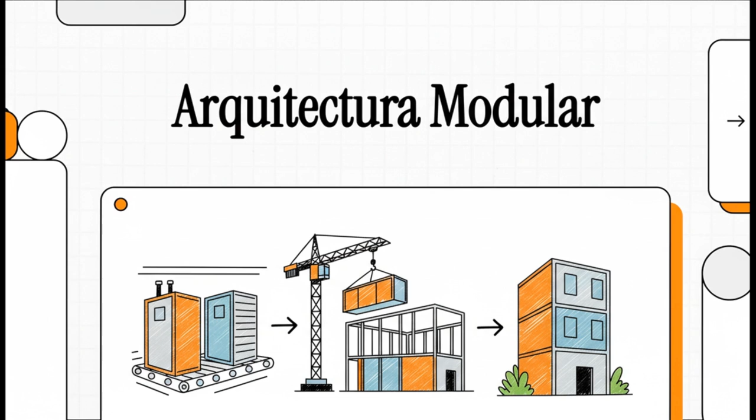¿Y si pudiéramos construir edificios de altísima calidad, pero mucho más rápido y con menos desperdicio? Suena bien, ¿no? Bueno, pues justo de eso se trata una idea que está de verdad cambiando las reglas del juego en la construcción: la arquitectura modular. Es una respuesta súper innovadora a lo que necesitamos hoy en día.

Y esta pregunta es la clave de todo, de verdad. Imaginen por un segundo la precisión, la eficiencia, ese control de calidad casi perfecto de una fábrica de coches. Pero ahora apliquen todo eso a las casas, a las oficinas, a los lugares donde pasamos la vida. Justo esa es la gran promesa de la arquitectura modular.

Es que, seamos honestos, la forma en que hemos construido siempre tiene sus broncas, ¿no? Los retrasos son el pan de cada día, los costos se disparan y ni hablar del impacto ambiental. Por eso, la verdad, urge encontrar otras formas de hacer las cosas, maneras más inteligentes de construir nuestro mundo.

Y es justo ahí, en ese punto, donde la arquitectura modular levanta la mano. No es nomás una opción más, ¿eh? Es una respuesta directa y muy pensada a todo esto que estamos hablando. Lo que busca es optimizarlo todo: recursos, tiempo, energía, vamos, todo lo que es súper valioso hoy.

Ok, entonces ya vimos el por qué. ¿Por qué necesitamos algo nuevo? Ahora vamos a meternos de lleno al qué, o sea, ¿qué es exactamente esto? Y para entenderlo bien hay que empezar por su pieza clave, su corazón: el módulo. En pocas palabras, es un método que parte un proyecto enorme en pedacitos, en piezas que se pueden manejar mucho mejor y que se construyen dentro de una fábrica, en un ambiente totalmente controlado.

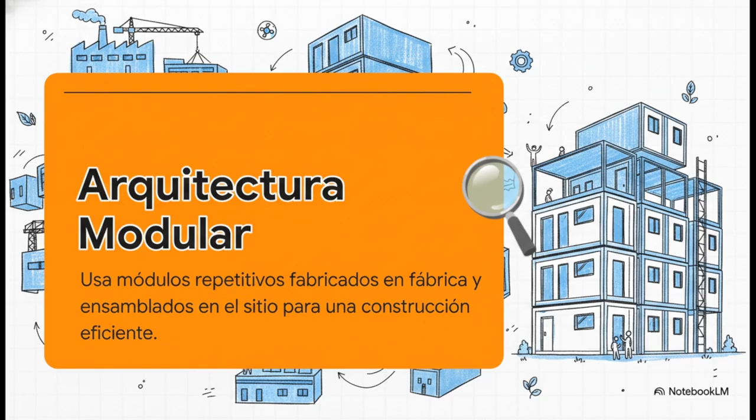Piénsenlo así: es como jugar con Legos, pero Legos gigantes, de alta tecnología, que al final se juntan en el terreno para formar el edificio completo. Pero ojo, y esto es súper importante, un módulo no es nomás una caja vacía, para nada. Puede llegar ya de fábrica con todo listo: la plomería, los cables de la luz, los acabados, hasta las ventanas puestas. O sea, es una pieza súper sofisticada, prácticamente terminada.

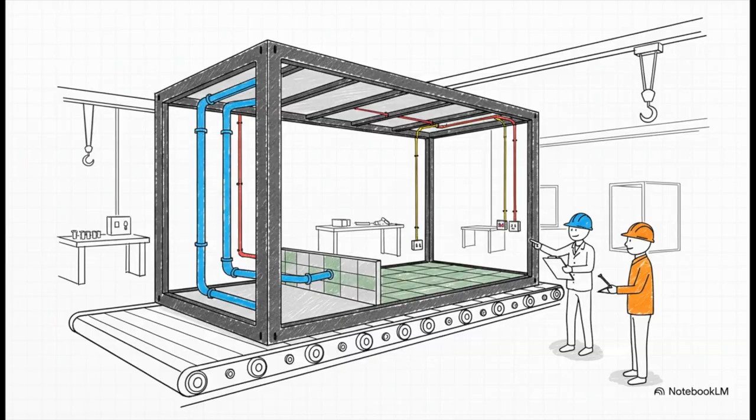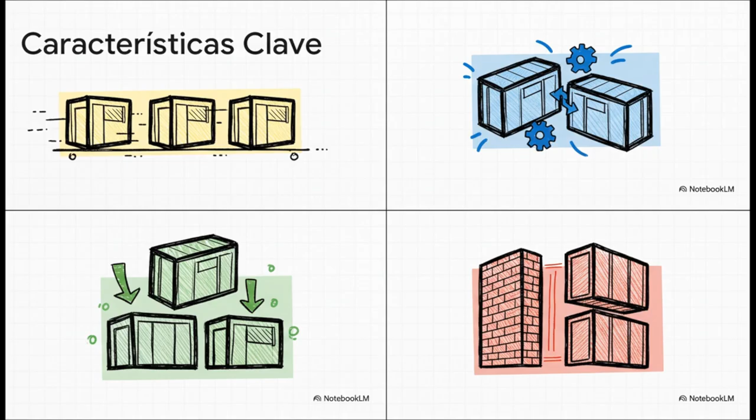Y lo que hace que estos módulos sean tan geniales son estas 4 características. Primero, son repetitivos, o sea, se pueden producir en serie como si fueran coches, lo que los hace súper eficientes. Segundo, son interconectables: todo está diseñado para que embonen a la perfección, sin fallas, como un rompecabezas de precisión milimétrica. Luego está la flexibilidad: se pueden añadir, quitar o cambiar módulos, así el edificio puede crecer o adaptarse a nuevas necesidades. Y por último, se pueden integrar con la construcción de toda la vida. Esta mezcla le da una versatilidad increíble.

Muy bien, entonces, ¿cómo funciona todo esto en la práctica? Bueno, el proceso es de hecho una de sus ventajas más grandes, porque le da una vuelta de 180 grados a la forma tradicional de trabajar. Aquí es donde está la verdadera magia del asunto. Fíjense bien, lo que cambia todo es que los 2 primeros pasos, la fabricación en la fábrica y la preparación del terreno, suceden al mismo tiempo.

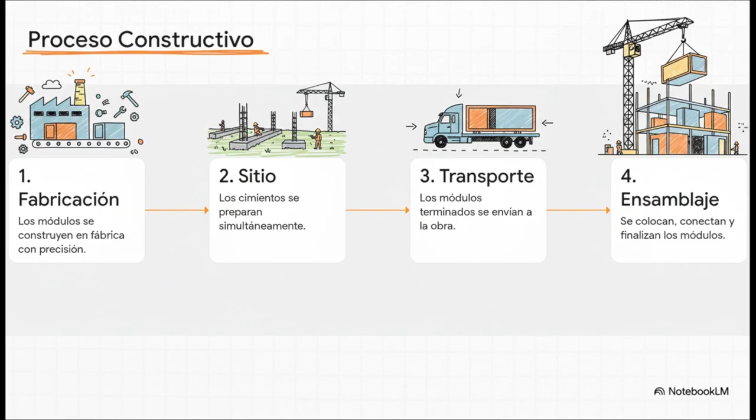Mientras en un lugar se están construyendo los módulos con una precisión increíble, en el sitio de la obra ya están preparando los cimientos. Esto solito elimina meses de tiempo muerto del proyecto. Es un cambio brutal. Y claro, toda esta eficiencia en el proceso se traduce, como es de esperarse, en beneficios súper concretos, de esos que se pueden medir, que al final del día es lo que cuenta.

Entonces, para resumir, tenemos ahorros importantes en costos y en tiempo. La calidad es mucho mayor porque no es lo mismo construir a la intemperie que en un ambiente controlado de fábrica. Y además es más sostenible, menos basura y edificios que gastan menos energía. Son puros beneficios. Ahora, para lograr este nivel de precisión y eficiencia, el material que se usa es clave.

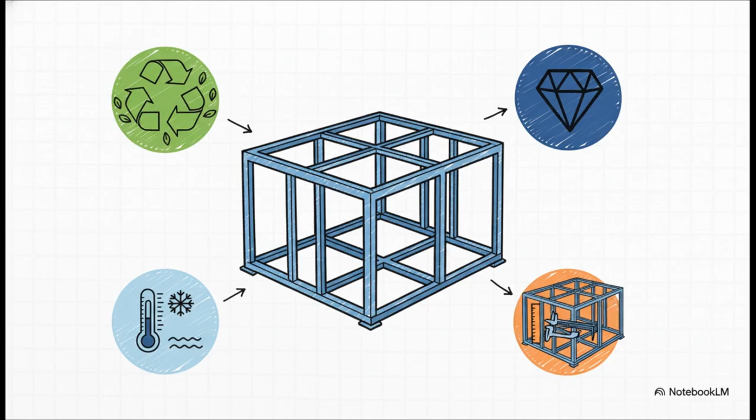Y en este mundo de la construcción modular, hay un material que es el rey. Hablamos del acero. Es perfecto para esto. Es súper resistente, pero a la vez ligero, lo que ayuda muchísimo a la hora de transportar los módulos. Se puede reciclar casi al 100%, así que cumple con la parte de la sostenibilidad. Y sobre todo, su uniformidad lo hace ideal para los procesos de fabricación que necesitan una precisión casi quirúrgica.

Allá por 1967, el proyecto Habitat 67 en Montreal fue como un grito al futuro, un experimento increíble que demostró lo que se podía hacer. Era una visión. Hoy, esa visión ya no es un experimento loco, es una realidad, una solución súper práctica gracias a la tecnología. Y si miramos hacia el futuro, parece que va a ser una pieza clave para construir las ciudades más densas y sostenibles que tanto necesitamos.

Y esto nos lleva a una reflexión final bien interesante, porque la arquitectura modular es mucho más que un simple método de construcción. Es una invitación a cambiar el chip, a pensar diferente sobre cómo creamos nuestros espacios. Se trata de diseñar pensando desde el principio en la flexibilidad, en la adaptación y, por supuesto, en una producción mucho más inteligente y responsable.

Así que nos quedamos con esta pregunta flotando en el aire. ¿Será que en nuestro futuro ya no se construye ladrillo por ladrillo, bajo el sol y la lluvia, sino que se ensambla con la precisión de un relojero? Todo apunta a que el futuro efectivamente se ensambla.

Bueno, pues interesante, ¿no? Está hablando de una filosofía más que de una forma de construir, es una manera de pensar. Así que vamos entonces a entrar en este interesante tema.

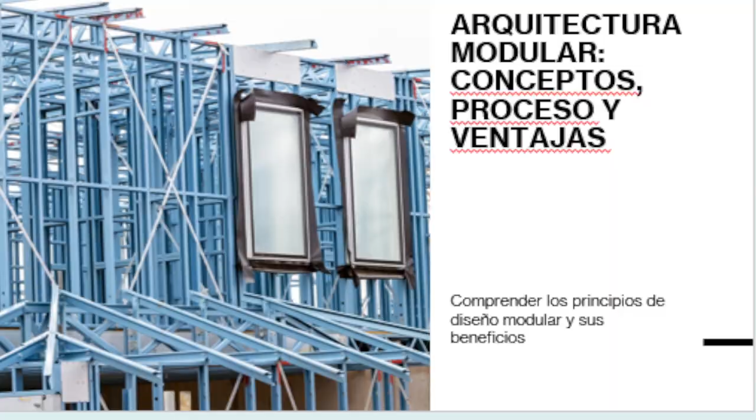Entonces, vamos a introducirnos a la arquitectura modular, ya no como principio solo de diseño, solo de concepto, sino como un concepto que tiene que ver con las diferentes formas en las que la construcción y por supuesto la industria ha ido mejorando e irá también avanzando en ese sentido hasta lograr una sistematización industrial de estos procesos que cada día son más comunes.

Muy bien, entonces, ¿cuál sería la relevancia, la importancia que tiene para nosotros en el punto de la arquitectura contemporánea? Bueno, primero es que los módulos se diseñan de manera general, siempre de manera prefabricada. Piensen un poquito en lo que les estoy pidiendo que ustedes realicen ahorita en esta parte preliminar del ejercicio, en donde el módulo, es decir, el cubo, tiene una función netamente industrial.

De hecho, el ejercicio consiste básicamente en eso, en que ustedes resuelvan solo uno de los módulos, que es lo que quiero que ustedes entreguen o que debieron haber entregado ya el día de hoy. Y por supuesto que también a partir de ese módulo se realice un proceso de industrialización. ¿Cómo va a ser?

Bueno, van a sacar ahora copias fotostáticas, no las van a sacar de manera común, van a tener que buscar un material que es la opalina o el papel cuché. Preferentemente, yo solicito que sea el papel cuché. El papel cuché es un papel mucho más grueso, por supuesto mucho más brillante y da un acabado que nos va a dar como resultado de la pared un elemento muy interesante. Entonces, eso lo van a tener que reproducir, por eso digo, a nivel industrial.

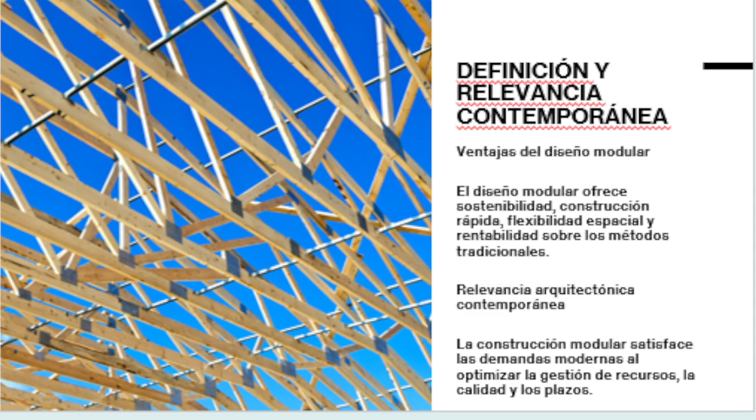Muy bien. Ahora, ¿qué más podemos decir nosotros en términos de esta condición en la que nos movemos en términos del proyecto? Pues que en el corazón de este concepto está el módulo. ¿Qué es un módulo? Bueno, hemos ya visto acerca de esto. Hemos platicado acerca de cómo las condiciones en las que nosotros estamos diseñando es simplemente una repetición de un elemento que de manera prefabricada, en el contexto constructivo, nos sirve para integrar muchas unidades, sumas, y en eso consiste el ejercicio, sumas de unidades que van a generar diferentes estructuras.

Bueno, entonces la función básica del módulo o la condición básica es su repetitividad. Es decir, que nosotros vemos que el mismo está constantemente en la misma situación y por supuesto también tiene el mismo tamaño, la misma forma y desarrolla la misma función o funciones similares, lo que permite que haya una fácil producción en masa e integración de sistemas. Entonces, eso sería básicamente la conceptualización que tenemos acerca del módulo.

Muy bien. Entonces, ¿cuáles son algunos otros componentes o elementos que nos ayudan? Bueno, pues su interconectividad, su flexibilidad y también la posibilidad de integrarlo con métodos tradicionales cuando se adaptan para recibirlos, mejorando su versatilidad. Es decir, la modulación no es solamente un concepto que tiene que ver con lo nuevo, con lo que se hace por primera vez, sino también con una intencionalidad en donde existen recursos para poder integrar el módulo a construcciones que ya son tradicionales o construcciones previas.

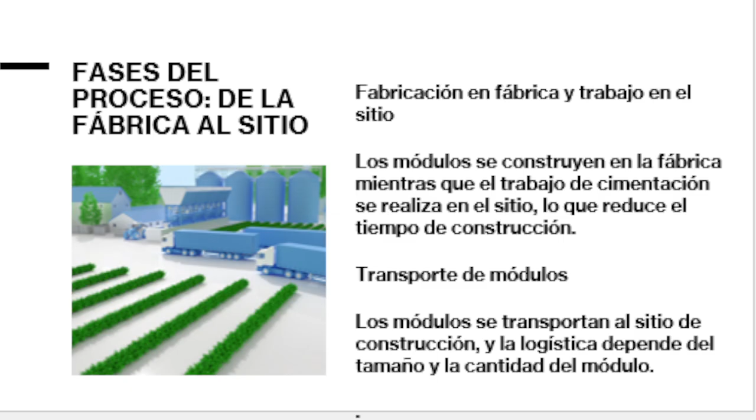En este contexto, construido el módulo, que incluso se puede construir con las ventanas y demás, nada más llega y se coloca en el sitio. Y pues, por supuesto, una grúa y demás harán todo el sistema de montaje de las diferentes piezas.

Otra de las características del módulo es que estas unidades prefabricadas... perdón, aquí me regresé a la diapositiva anterior, una disculpa. Estamos aquí, muy bien.

Entonces el montaje es lo que diríamos es importante. Mencionaba yo lo de las grúas, cómo se colocan en el sitio, y de esta manera van reduciendo muchísimo los tiempos de ejecución. Sobre todo hay una cosa importantísima: la calidad de la ejecución. No en este momento, pero después les voy a hablar específicamente de una casa que se hizo en Estados Unidos con estas características, donde la casa se monta en un día. Una casa bastante interesante como concepto constructivo y de diseño, que se hace con este mismo sistema.

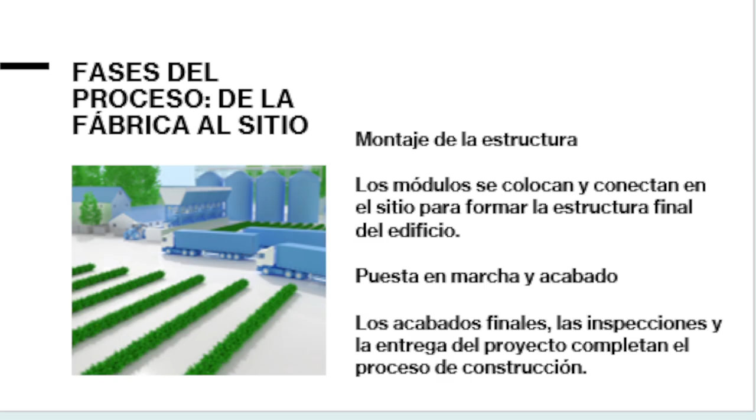Es el montaje con unas grúas y demás, y después de esta etapa ya sería el de los acabados, que pueden ser algunos detalles que se vayan puliendo, porque el módulo ya puede venir con los acabados. Pero sí la parte que tiene que ver con darle ya una unidad formal a todo el exterior. Entonces ahí estaríamos hablando de cuáles serían algunos de los procesos que se llevan en ese sistema, y pasaríamos a ver cuáles son algunas de las ventajas que tiene la arquitectura modular.

Primero, las instalaciones técnicas se optimizan porque, por ejemplo, todo lo que tiene que ver con la plomería y la electricidad se puede realizar en el módulo, en la fábrica; no tiene que llegar allá el electricista a atender tuberías, cables, ni nada que tenga que ver con la instalación de tableros, etcétera. Ya todo viene perfectamente armado. Sería una de las cuestiones básicas que se puede optimizar en ese sentido.

También se puede mejorar la eficiencia energética. ¿En qué sentido? Pues que estos módulos también pueden integrar dentro de su construcción sistemas de aislamiento térmico, aislamiento acústico, y todo esto va a generar una eficiencia energética.

Actualmente tenemos problemas con las fugas de aire acondicionado, por ejemplo en el salón, en otros lugares, porque no están diseñados los espacios para prever que los muros de bloc o las cancelerías de aluminio no tengan fugas, en el sentido de la eficiencia; es decir, los aires están prendidos todo el día.

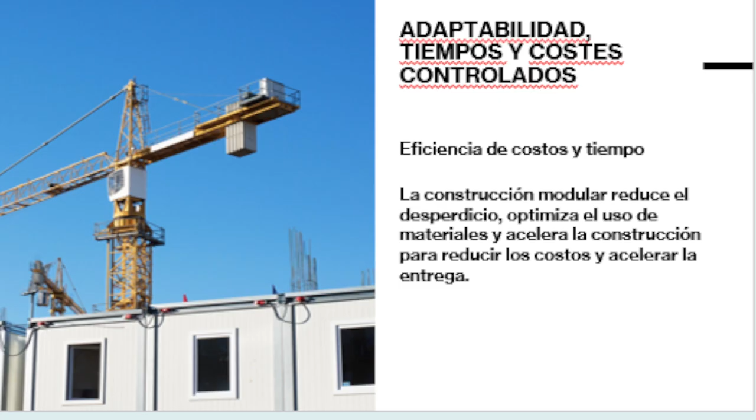Entonces, en las fábricas y en los sistemas que están ya más sistematizados, no se tiene esta problemática climática. Esto hace que los costos se reduzcan, que también se acelere la construcción y también se aceleren los tiempos de entrega en un tiempo en donde cada vez se hace más complicado generar las viviendas que necesitamos con mayor velocidad.

Y también el uso de los materiales nos ayuda en este contexto: la madera, los acabados vegetales, son algunas de las posibilidades que tenemos con respecto a las diferentes formas en las que se pueden integrar los materiales. El acero también lo vimos en la parte del video inicial, es uno de los que ayudan bastante, porque es reciclable y es ligero en el sentido de la transportación.

Imagínense, solamente módulos de concreto, pues son pesados, pero uno de los grandes beneficios es este tema que siempre va a estar en discusión. Lo aclaro desde ahorita, porque hay quienes hablan mucho de cómo la densidad, es decir, el número de viviendas o construcciones que hay en un lugar, afectan la parte que tiene que ver, en el caso nuestro, con el entorno, el ambiente.

En la medida que hay muchos espacios horizontales, pues lo vemos aquí en Playa del Carmen, van creciendo las unidades habitacionales, siempre en un sentido horizontal. Bueno, la construcción modular ayuda muchísimo para la expansión vertical urbana, es decir, esto permite que no haya tanto desarrollo en el sentido horizontal, reduciendo tiempos de movilidad. Trae otras problemáticas que no es el punto a aclarar ahorita, pero es una de las ventajas que podría tener básicamente el diseño modular.

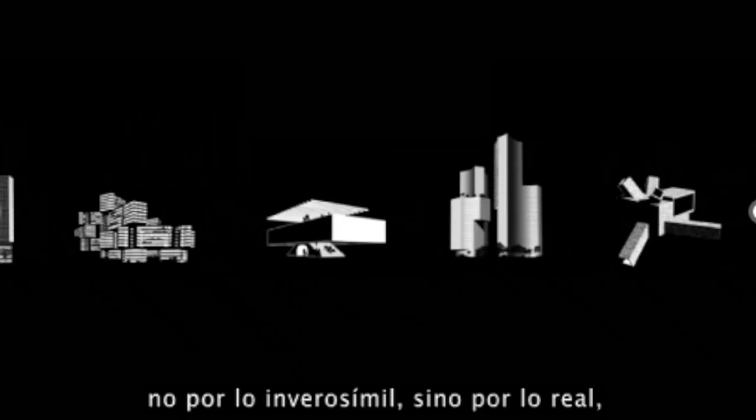In this sense, I'm interested in fiction not as the implausible, but as the real, as the reality of what architecture means for the people that live in it and with it.

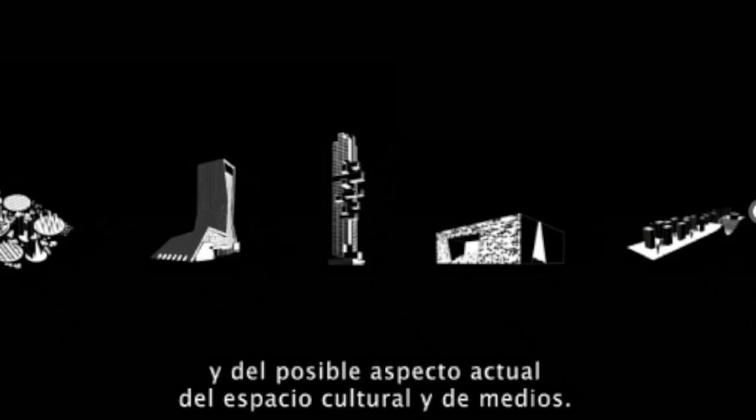Our buildings are prototypes, ideas for how the space of living or how the space of working could be different, and how a space of culture or a space of media could look like today. Our buildings are real, they're being built. They're an explicit engagement in physical reality and conceptual possibility.

I think of our architecture as organizational structures. At their core is indeed structural thinking, like a system. How can we arrange things in both a functional and experiential way? How can we create structures that generate a series of relationships and narratives?

And how can fictive stories of the inhabitants and users of our buildings script the architecture, while the architecture scripts those stories at the same time?

And here comes the second term into play, what I call narrative hybrids. Structures of multiple simultaneous stories that unfold throughout the buildings we create. So we could think of architecture as complex systems of relationships, both on a programmatic and functional way, and in an experiential and emotive or social way.

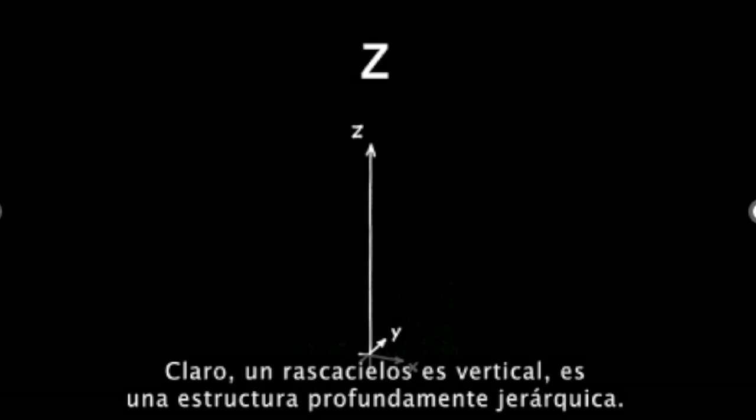Of course, the skyscraper is vertical. It's a profoundly hierarchical structure, the top always the best, the bottom the worst, and the taller you are, the better so it seems. And we wanted to ask ourselves, could a building be about a completely different quality? Could it undo this hierarchy? And could it be about a system that is more about collaboration rather than isolation?

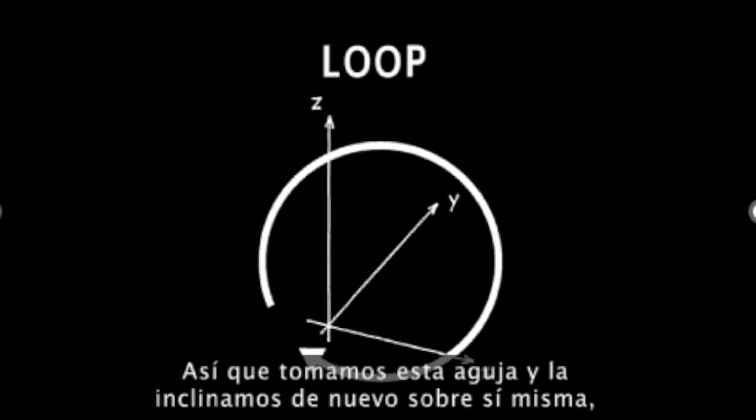So we took this needle and bent it back into itself, into a loop of interconnected activities.

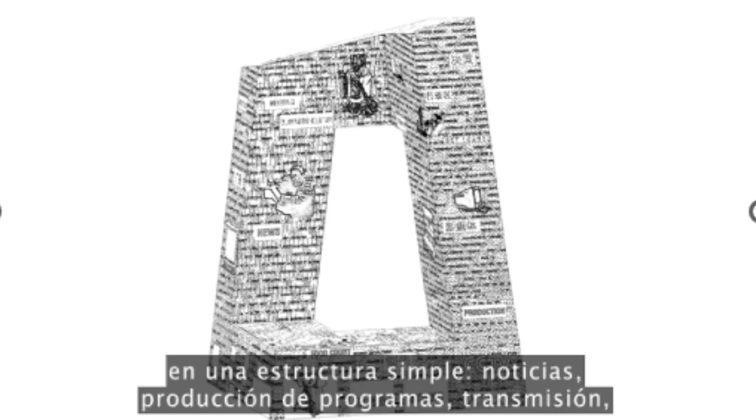Our idea was to bring all aspects of television making into one single structure: news, program production, broadcasting, research and training, administration, all into a circuit of interconnected activities where people would meet in a process of exchange and collaboration.

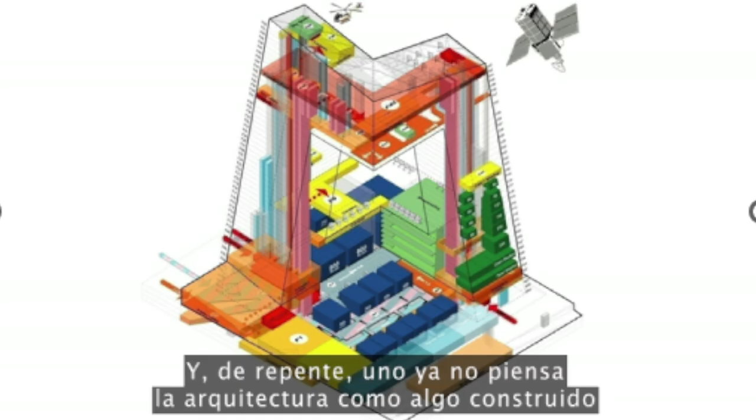I still very much like this image. It reminds me of biology classes, if you remember the human body with all its organs and circulatory systems, like at school. And suddenly you think of architecture no longer as built substance, but as an organism, as a life form.

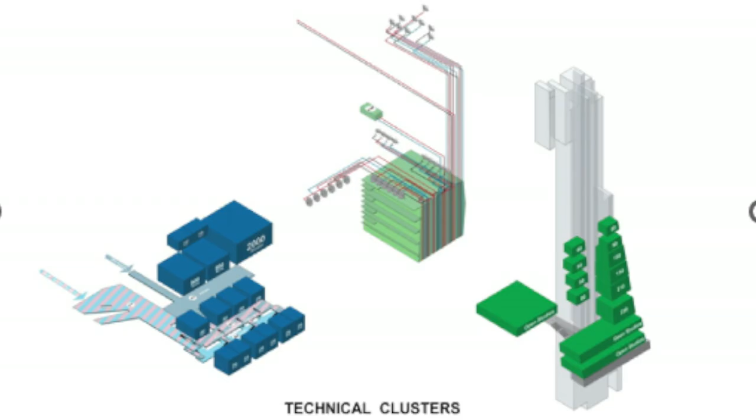As you start to dissect this organism, you can identify a series of primary technical clusters: program production, broadcasting center, and news. Those are tightly intertwined with social clusters: meeting rooms, canteens, chat areas, informal spaces for people to meet and exchange. So the organizational structure of this building was a hybrid between the technical and the social, the human and the performative.

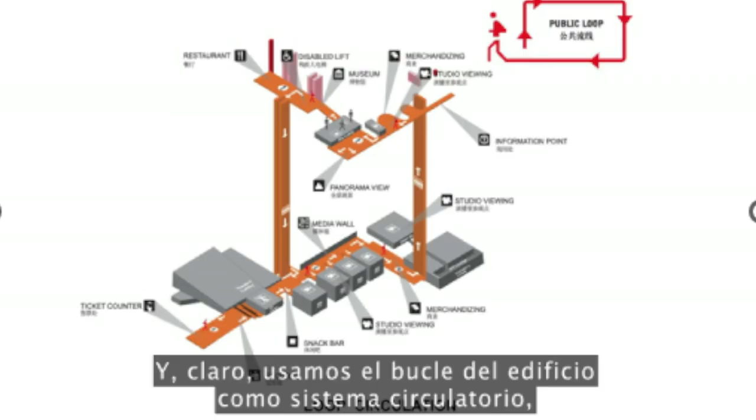And of course, we used the loop of the building as a circulatory system to thread everything together and to allow both visitors and staff to experience all these different functions in a great unity.

With 473,000 square meters, it is one of the largest buildings ever built in the world. It has a population of over 10,000 people, and of course this is a scale that exceeds the comprehension of many things, the scale of typical architecture.

So we stopped work for a while and sat down and cut 10,000 little sticks and glued them onto a model, just simply to confront ourselves with what that quantity actually meant. But of course it's not a number, it is the people, it is a community that inhabits the building.

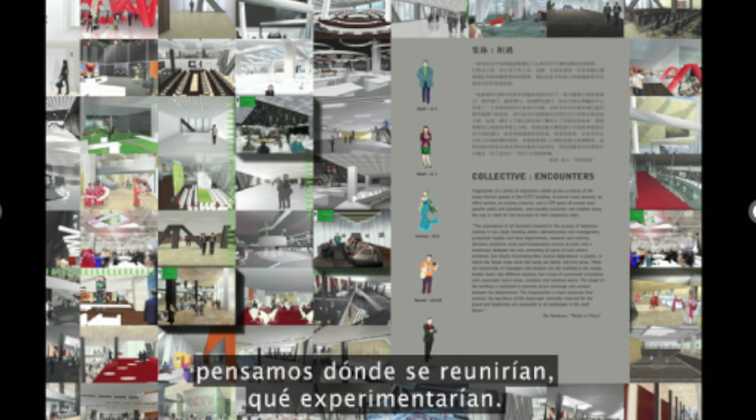In order to both comprehend this but also script this architecture, we identified 5 characters, hypothetical characters, and we followed them throughout their day in a life in this building, thought of where they would meet, what they would experience. So it was a way to script and design the building, but of course also to communicate its experiences.

And this was part of an exhibition with the Museum of Modern Art in both New York and Beijing.

The building has become part of everyday life in Beijing. It is there. It has also become a very popular backdrop for wedding photography.

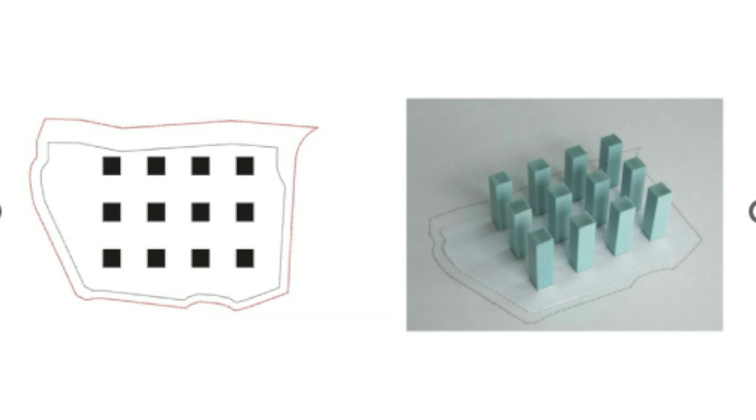The typical answer to the question, we had to design 1,040 apartments, would have looked like this: 24-story height limit given by the planning authorities, 12 towers with nothing but residual space in between.

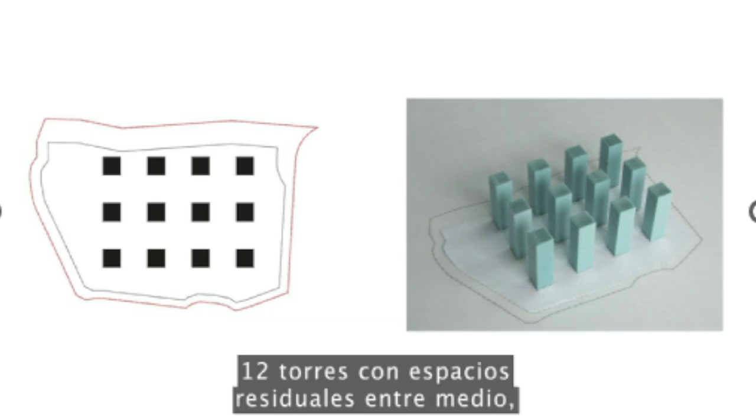A very tight system that, although the tower isolates you, doesn't even give you privacy because you're so close to the next one that it's very questionable what the qualities of this would be. So I proposed to topple the towers, throw the vertical into the horizontal, and stack them up.

What looks random from the side, if you look from the viewpoint of a helicopter, you can see its organizational structure is actually a hexagonal grid in which these horizontal building blocks are stacked up to create huge outdoor courtyards, central spaces for the community, programmed with a variety of amenities and functions. These courtyards are not hermetically sealed spaces - they're open, permeable, interconnected. We called the project the Interlace, thinking that we interlace and interconnect the human beings and the spaces alike.

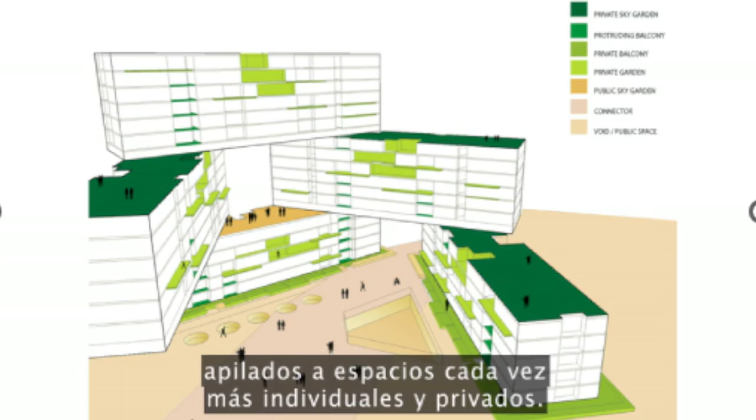The detailed quality of everything we designed was about animating this space and giving this space to the inhabitants. In fact, it was a system where we would layer primarily communal spaces, stacked to more and more individual and private spaces, opening up a spectrum between the collective and the individual.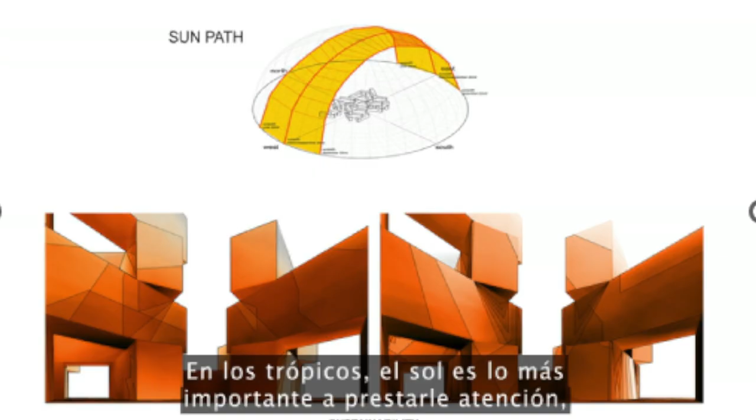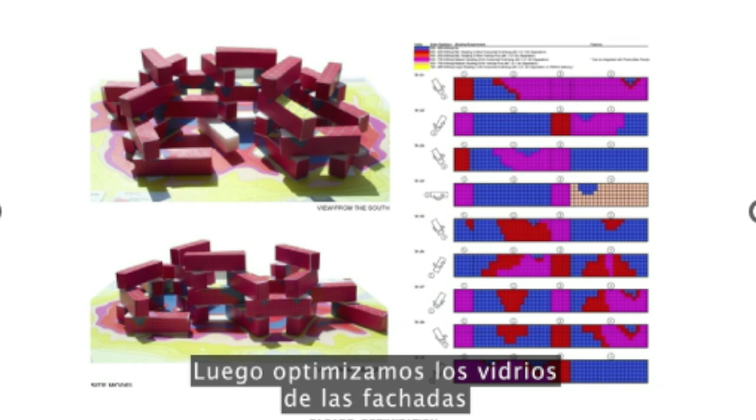We paid a lot of attention to sustainability. In the tropics, the sun is the most important thing to pay attention to - it's about seeking protection from the sun. We first proved that all apartments would have sufficient daylight throughout the year. We then optimized the glazing of the facades to minimize energy consumption. Most importantly, we could prove that through the geometry of the building design, the building itself would provide sufficient shading to the courtyards so they'd be usable throughout the entire year.

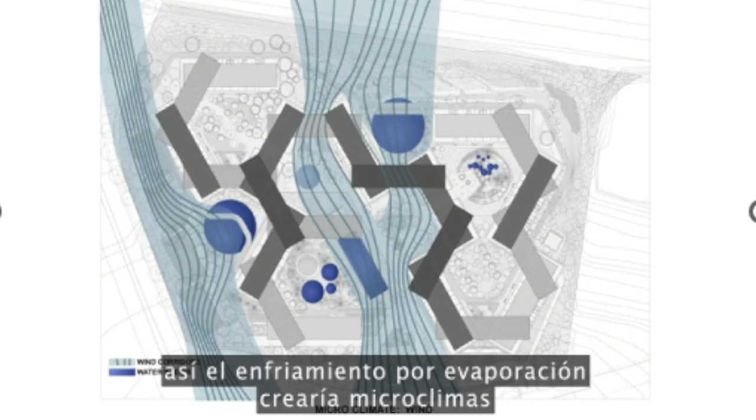We further placed water bodies along the prevailing wind corridors so that evaporative cooling would create microclimates that would enhance the quality of those spaces available for the inhabitants. It was the idea of creating this variety of choices, a freedom to think where you would want to be, where you would want to escape maybe, within the own complexity of the complex in which you live.

We're coming from Asia to Europe - a building for a German media company based in Berlin, transitioning from traditional print media to digital media. Its CEO asked a few very pertinent questions: why would anyone today still want to go to the office, because you can actually work anywhere? And how could a digital identity of a company be embodied in a building?

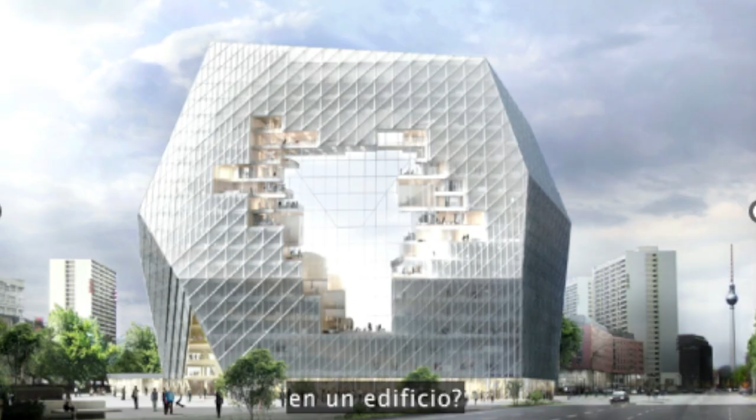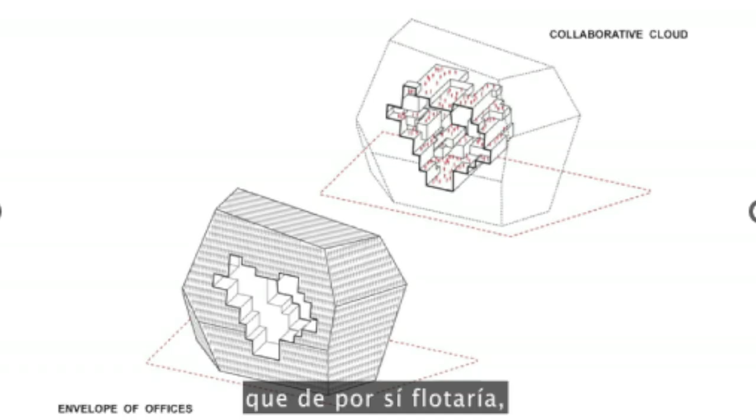We created not only an object, but at the center of this object, we created a giant space. This space was about the experience of a collective, the experience of collaboration and togetherness - communication, interaction as the center of a space that in itself would float like what we called the collaborative cloud in the middle of the building, surrounded by an envelope of standard modular offices. So with only a few steps from your quiet work desk, you could participate in the giant collective experience of the central space.

Finally, we come to London, a project commissioned by the London Legacy Development Corporation of the Mayor of London. We were asked to undertake a study and investigate the potential of a site out in Stratford in the Olympic Park. In the 19th century, Prince Albert had created Albertopolis, and Boris Johnson thought of creating Olympicopolis. The idea was to bring together some of Britain's greatest institutions, some international ones, to create a new system of synergies. Prince Albert, as he had created Albertopolis in the 19th century, thought of showcasing all achievements of mankind, bringing arts and science closer together, and he built Exhibition Road, a linear sequence of those institutions.

But of course, today's society has moved on from there. We no longer live in a world in which everything is as clearly delineated or separated from each other.

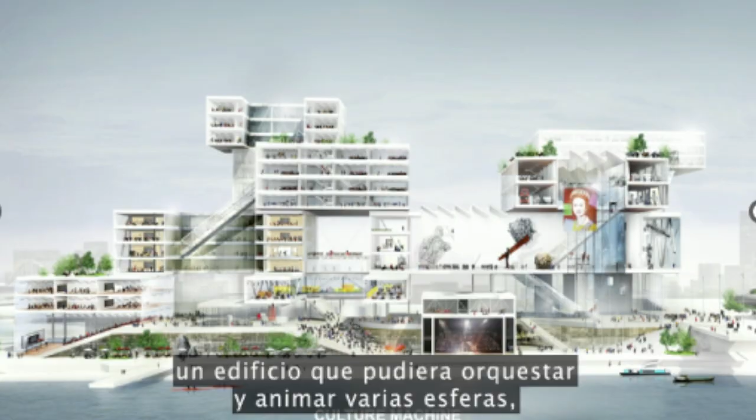We live in a world in which boundaries start to blur between the different domains, and in which collaboration and interaction becomes far more important than keeping separations. So we wanted to think of a giant culture machine, a building that would orchestrate and animate the various domains, but allow them to interact and collaborate.

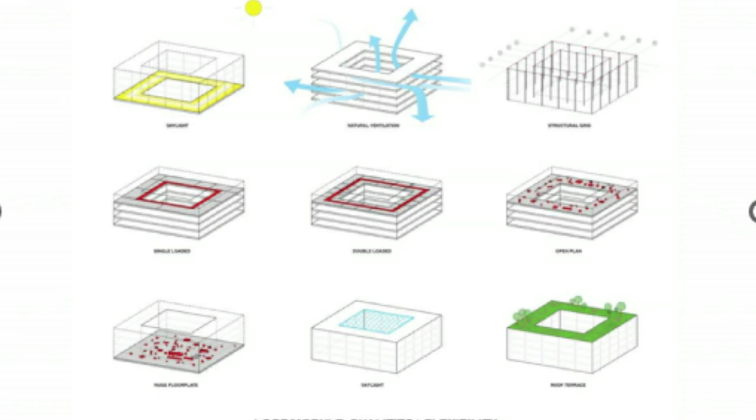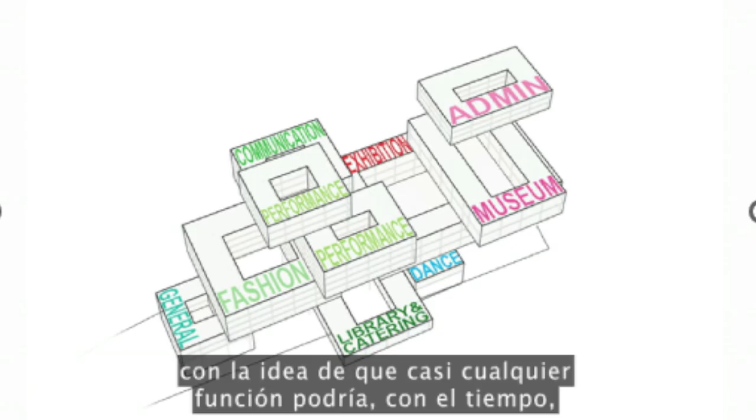At the base of it is a very simple module, a ring module. It can function as a double-loaded corridor, has daylight, has ventilation. It can be glazed over and turn into a giant exhibition or performance space. These modules were stacked together with the idea that almost any function could, over time, occupy any of these modules, so institutions could expand or contract, as the future of culture is in a way the most uncertain of all. This is how the building sits adjacent to the Aquatic Center, opposite the Olympic Stadium.

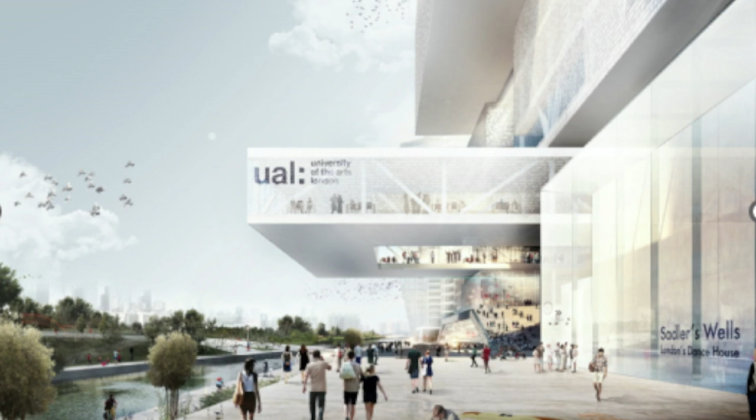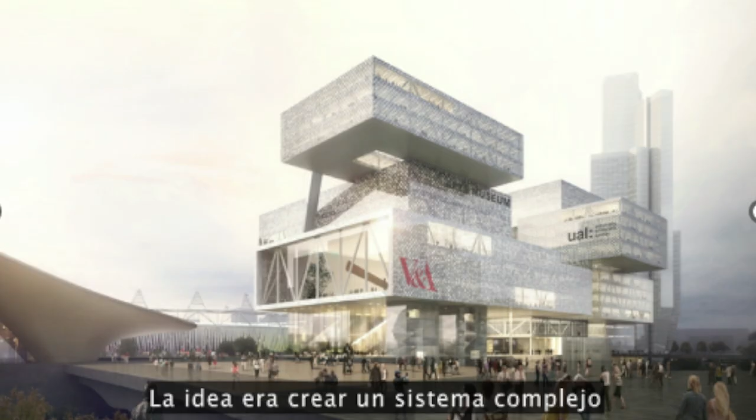You can see how its cantilevering volumes project out and engage the public space, and how its courtyards animate the public inside. The idea was to create a complex system in which institutional entities could maintain their own identity, in which they would not be subsumed in a singular volume.

Here's a scale comparison to the Centre Pompidou in Paris. It both shows the enormous scale and potential of the project, but also the difference. Here, it is a multiplicity of a heterogeneous structure in which different entities can interact without losing their own identity.

And it was this thought to create an organizational structure that would allow for multiple narratives to be scripted, for those in the educational parts that create and think culture, for those that present the visual arts, the dance, and for the public to be admitted into all of this with a series of possible trajectories to script their own reading of these narratives and their own experience.

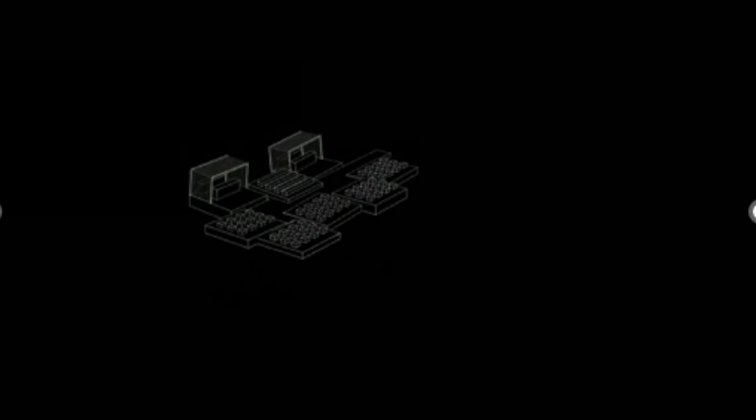And I want to end on a project that is very small, in a way very different: a floating cinema in the ocean of Thailand. Friends of mine had founded a film festival, and I thought, if we think of the stories and narratives of movies, we should also think of the narratives of the people that watch it.

So I designed a small modular floating platform based on the techniques of local fishermen, how they built their lobster and fish farms. We collaborated with the local community and built, out of recycled materials of their own, this fantastical floating platform that gently moved in the ocean as we watched films from the British Film Archive, 1903's Alice in Wonderland for example, the most primordial experiences of the audience that merged with the stories of the movies.

So I believe that architecture exceeds the domain of physical matter, of the built environment, but is really about how we want to live our lives, how we script our own stories and those of others. Thank you.